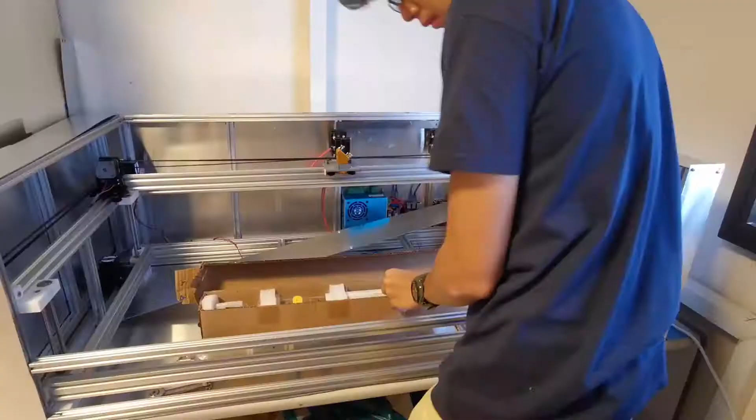Here's an idea for you. Every maker should have these three machines. They are a 3D printer, a CNC router, and a laser cutter. Of course, we aren't going to buy one, although it'll probably be much cheaper in the long run and save blood, sweat, tears, and maybe cash as well, because where's the fun in that? Instead, we're going to build ourselves from scratch.

So here are some basic specs if you're hoping to get a rough idea of what this project will be about. So let's move on to the cost. So we are going to go over the projected and actual cost of this machine, and I originally intended to spend no more than $500 on this machine, and the rough gauge of the breakdown of costs were as follows.

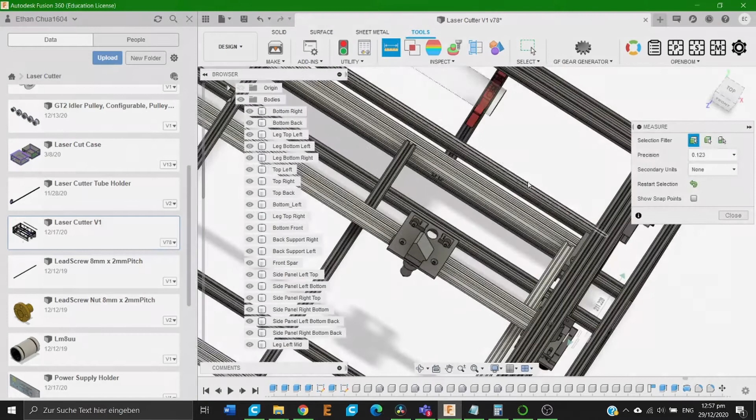So for the laser parts, I was intending to spend about $200. For the frame, it's going to spend about another $200. Electronics, power supply, $50. Miscellaneous parts, 3D printed parts, etc., another $50. So all in all, this is how much I spent thus far. This does not include miscellaneous items such as cooling and ventilation, but you get a rough idea.

For the frame, I've spent about $232. For the laser, tube and accessories, $192. For the electronics, $49. And for miscellaneous stuff like lead screws, smooth rods, printed parts, etc., $68, and this brings the grand total to about $541.

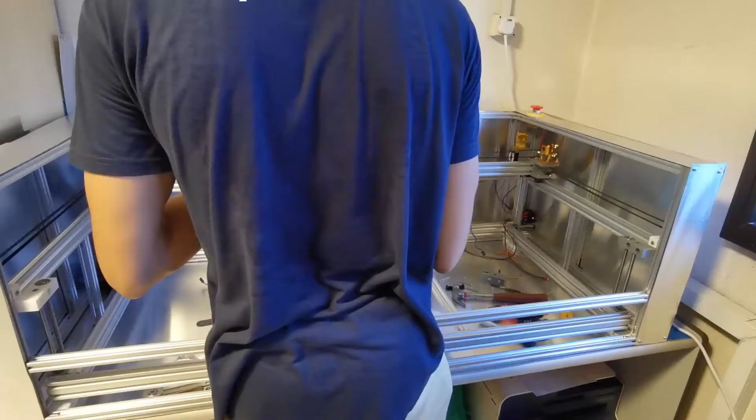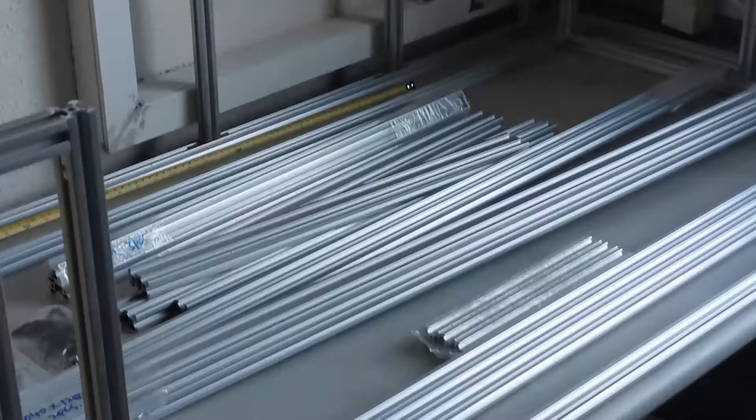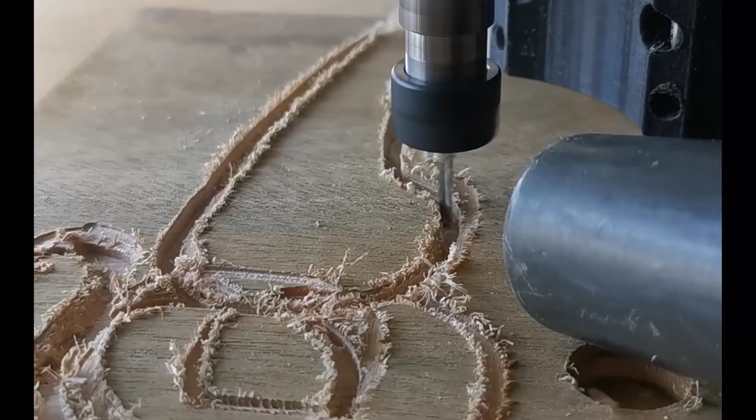It doesn't go to say that local/overseas plug-and-play lasers are no good. In some sense, you are paying for the reliability and troubleshooting that has already been done beforehand. At this juncture, I also like to point out that DIY isn't a silver bullet by any means. As I'm recording this right now, I should have invested more than 100 hours in designing, sourcing and building this laser cutter, and I'm still grappling with some stupid issues which I would probably have not faced if I had simply bought a laser cutter off the shelf.

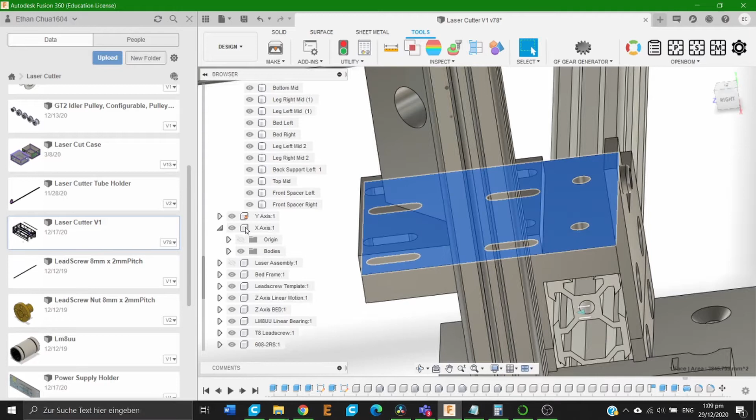But of course, there are other benefits, and don't get me wrong, these benefits are quite huge. For instance, you have absolute unchallenged say over the size of your laser cutter, which means that you can make it as big as you please. And trust me, for the amount of time you're going to spend on this project, you might as well make it as big as you possibly can. Taking a look at our contenders, we see that the build volume is pretty limited, but for us, we do have a whopping 1.2 by 0.5 meters, limited only by the size of our table.

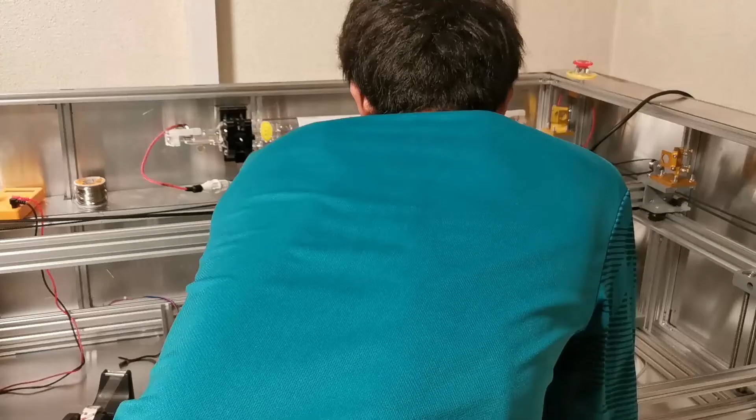Lastly, there isn't a joy as unspeakable and as pronounced as when you see your handmade creations come to life. Okay, maybe not, but you get the idea.

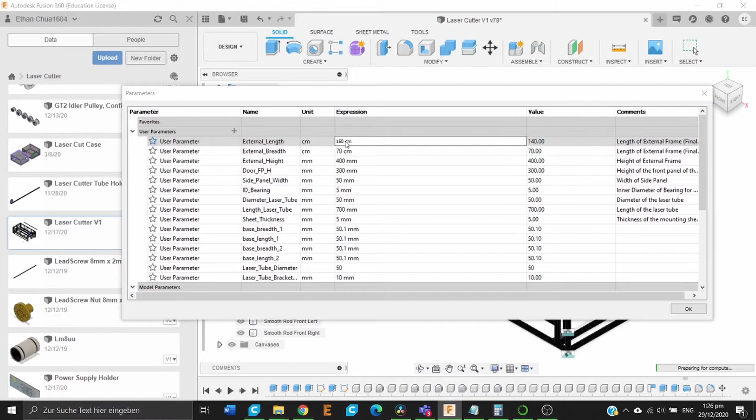Speaking of size, now it's time to discuss a bit about the design process. As mentioned, all parametric design was done in Fusion 360, and as you can see, it was not very well designed. For starters, what initially started out as an adjustable parametric design via parameters essentially broke down due to mistakes in the referencing and whatnot. I still do want to create a calculator that allows anyone to get lengths of aluminium profile for a custom size laser cutter though.

Moreover, the entire design was done before I learned about the wonders of components, so literally everything is a body, and any components you see here were made retrospectively.

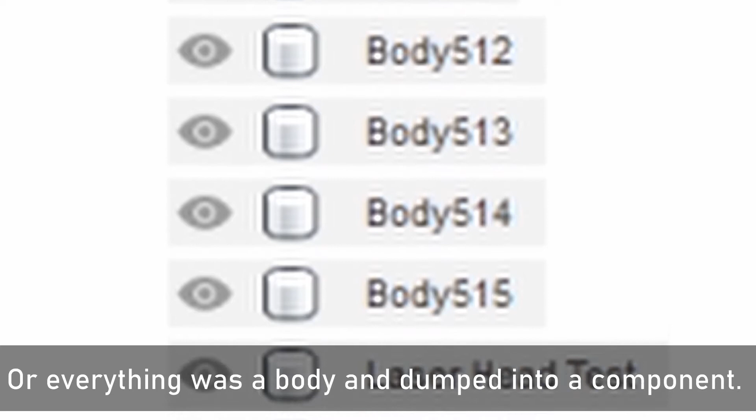As with all designs, we started with the table. In this case, it was a 1.4 by 0.7 meter table that is sitting on my workshop. While designing this laser cutter, I wanted to maximize the build area, because bigger is better, while ensuring that I could properly isolate the electronics from the cutting chamber.

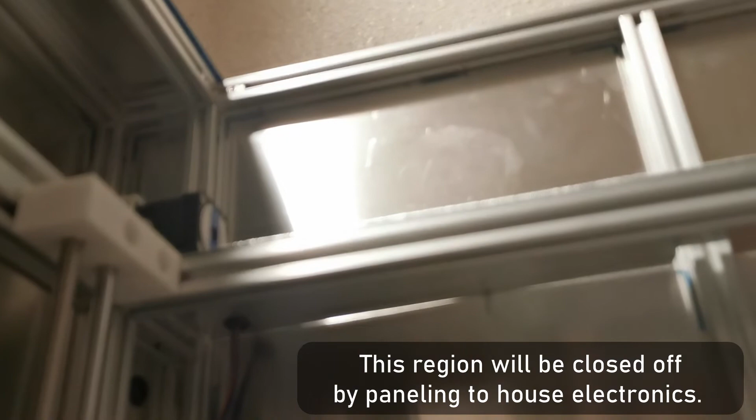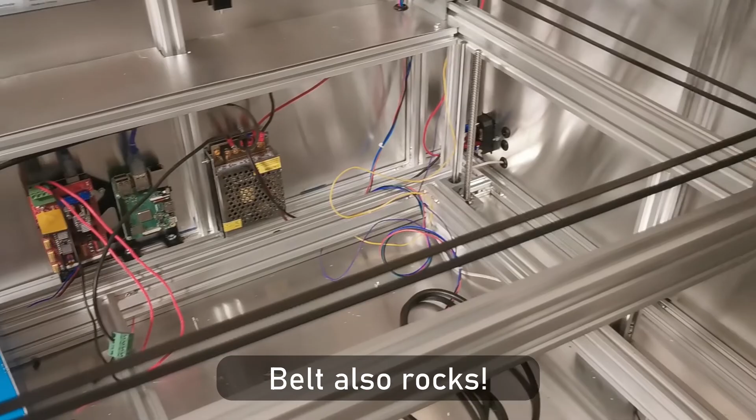As such, I designed the cutter first, trying to squeeze the X and Y steppers into the frame, and then basically designed everything up from there. To keep costs down, I ran with the cheap and cheerful V-slots rather than linear rails because they are cheaper. I also went for a belt design for the X and Y axes, because once again, belt is cheaper than lead screw. To position the steppers, I thought long and hard about my various options.

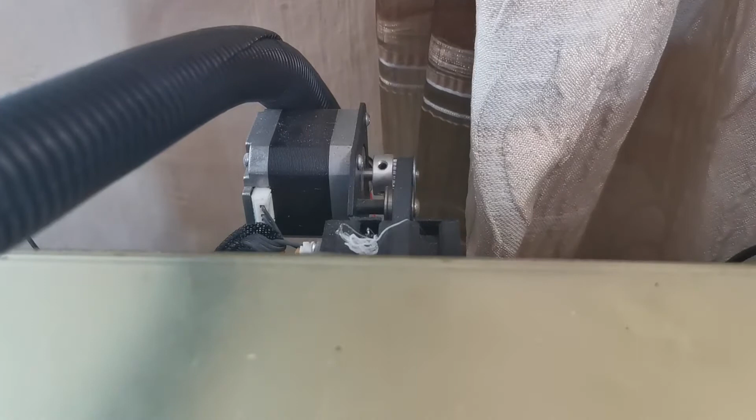On one hand, I could emulate something like the CR10 for that matter, or the Ender, with the stepper motor mounted next to the 2040 aluminium V-slot, like this, but that would mean I would have to put an idler pulley on the end of the V-slot, which means it would not be able to line up nice and square with the wall.

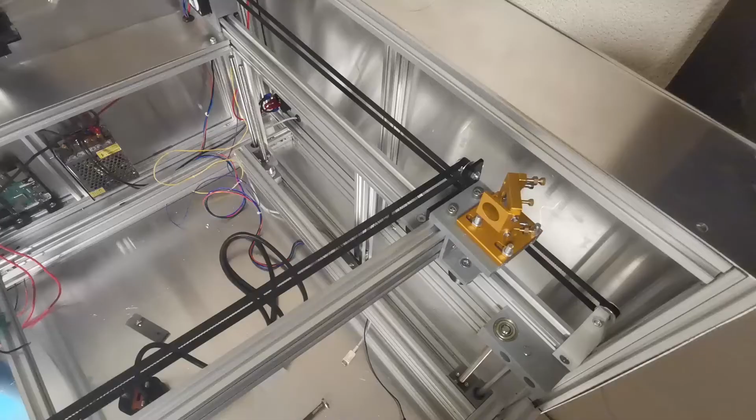Now, given that we couldn't afford an open concept frame for safety, I foresaw that it would be a pain trying to secure all the linear rails without having them attached to the side walls in some way or another. This was what led me to choose the method which I eventually settled on, having the steppers mount on top of the V-slots and drive a belt loop that literally also sits on top of the V-slot.

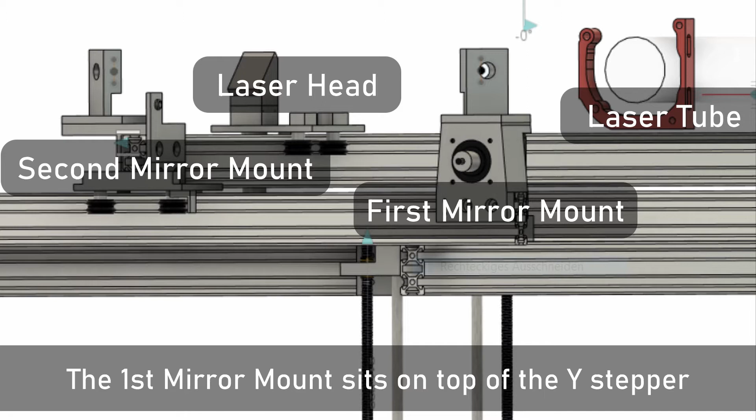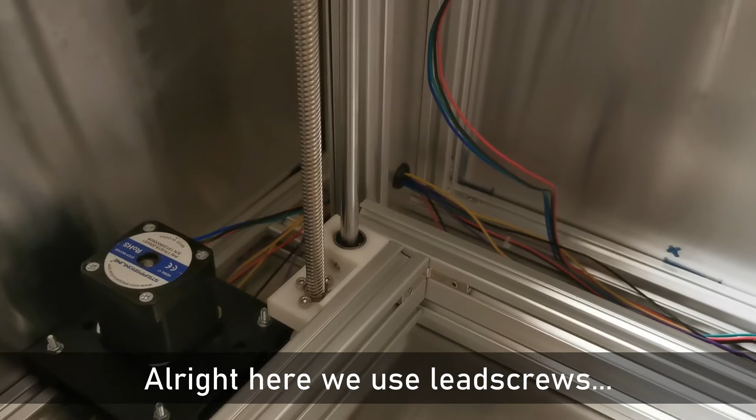The Z-axis is essentially the most clunky of the three, as it has to lift a massive bed which firstly weighs a ton thanks to the sheer amount of aluminum profile required to maintain and support the large bed, plus the soon-to-be honeycomb aluminum. The Z-axis was originally intended to be powered by a single stepper motor driving a massive belt, perimeter 3.8 meters, that would spin each of these 36 tooth pulleys. For that role, a 1 amp stepper would definitely be needed.

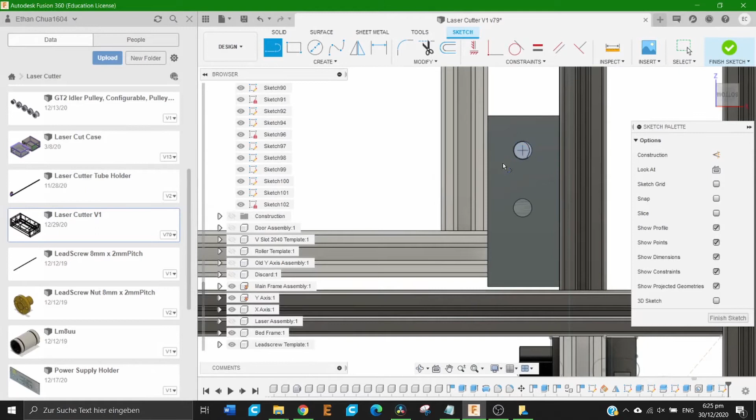However, my ambitious plans for a mega loop were soon foiled by the fact that nobody sells such a mega GT2 pulley loop, as I would need about 3.8 meters to be safe. And trying to stitch a belt into a closed loop is virtually impossible according to forums. Nonetheless, I decided to change my plan to include 2 steppers operating each side of the bed with 2 individual end stops in Marlin for the Z-axis, so assuming that Z-axis should be a thing, right Marlin?

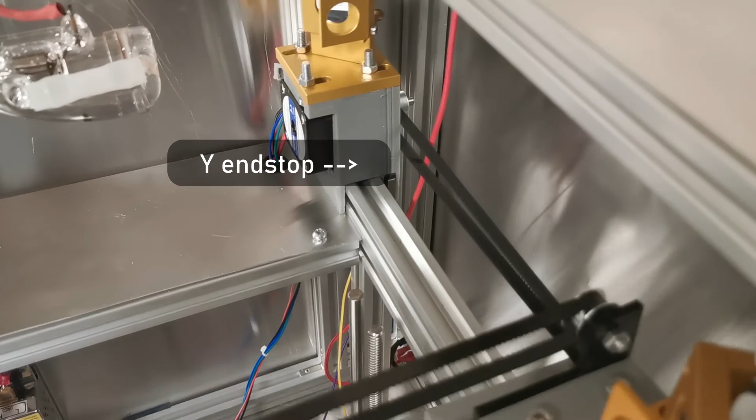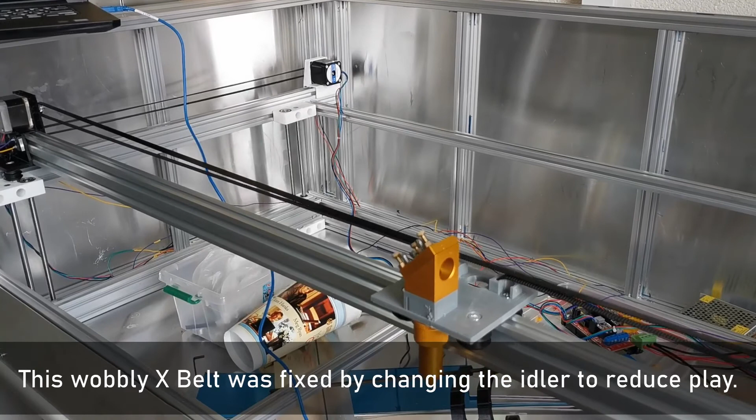Speaking of end stops, the Y end stops are nicely integrated into the stepper mount with 3D printed offsets triggering them. Initial trials saw some minor hiccups, which I'll elaborate during my rant video, but let's just say the basic design seems to have held up relatively well. The belt system seems to be holding up, dual Y end stops work well, and the system overall seems to be working. Yay!

In the next video, I will go over the physical build process and some things I learned along the way, as well as discuss the most interesting yet challenging part of this build, the aluminium exterior. I think that is all for the first video.